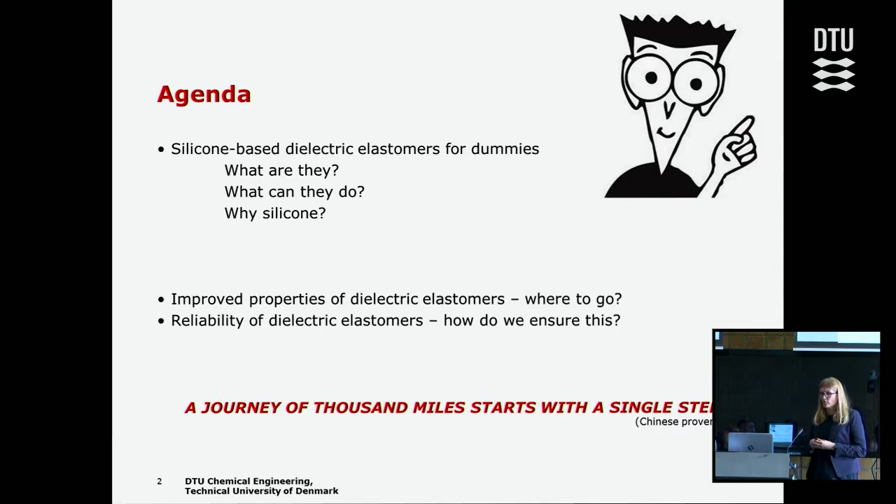Yes, thank you for the very nice introduction. And as Rasmus said, the title of my talk is Silicone-based Dielectric Elastomers. What I will be talking about is what silicone-based dielectric elastomers actually are, what they can do potentially, and why we actually chose to work with silicone. Then I will talk very briefly about where the majority of our work has been, in how we actually improve the properties of our dielectric elastomers, and also talk briefly about where I think in the future we will go. And then I will proceed to talking about reliability of dielectric elastomers and how we actually ensure that we have reliable elastomers.

So a dielectric elastomer consists of an elastomer, usually thin. It's comparable to Vita wrap films. It's just even more compliant because it's very stretchable, it's very elastic. And then we have compliant electrodes on, and when we apply a voltage over the electrodes, we will see a dimensional change of our elastomer, and then we can see that we convert electrical energy into mechanical energy. We can also do it the opposite way, where we simply actuate our material, and then we can get electrical energy out of that. That's the generator mode. We can also use it for sensing, so we can stretch it and then read the capacitance and get a measure of the deformation.

And when we talk about dielectric elastomers and why they are so great, why they are a new type of transducer, where they mostly excel is that we have a lightweight material, we have very stretchable materials, it's a strong material. And just to put it in perspective, Pippi Langstrømpe, my childhood hero, is actually able to carry one big horse. If we do the same analogy for our dielectric elastomers, Pippi should actually be able to carry 10 horses. Also in the illustration we have the small monkey riding along, and I think all the good things we have from the dielectric elastomers are also what actually create issues for us when we process, when we formulate.

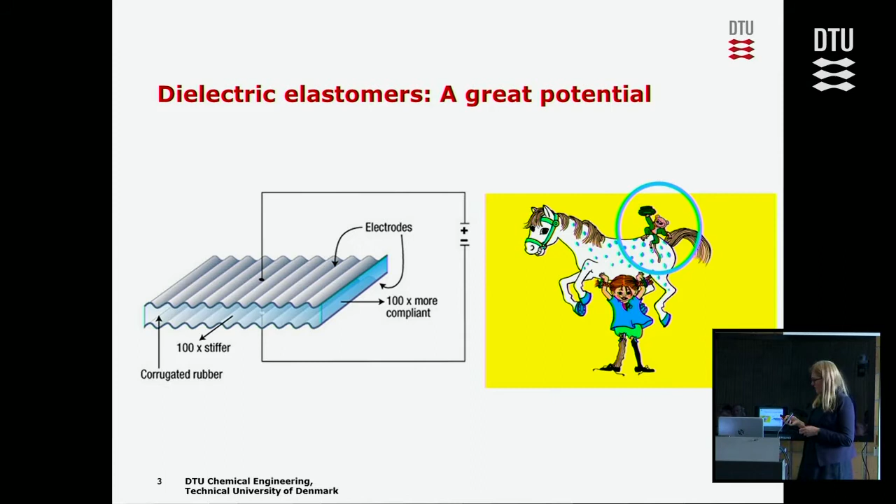So much of this talk will actually be how we get rid, like we will have to carry the 10 horses around, but we will try to get rid of the monkeys. For me, the product, a dielectric elastomer, the product is a film with compliant electrodes, but of course then other people, they proceed, they make it into products.

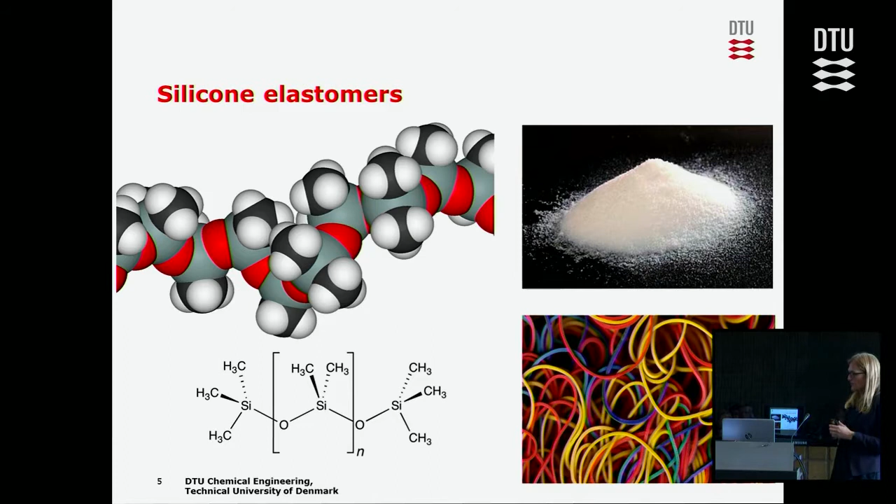So why did we choose silicone elastomers? They consist of the polydimethylsiloxane unit. We have long polymers. They're very soft, they're very flexible, they are thermally stable, and many other good properties. And then what we do is we simply cross-link it. Usually we add some silica, which is shown up there, and then we get our elastic material, which we can use for the energy transduction.

When we talk about silicone elastomers or silicone dielectric elastomers, then we are up against some other competitors. Acrylics, usually illustrated by the VHB tape from 3M. It's the double adhesive, which is used to a large extent to showcase what can we actually do with this type of materials, simply because they can show actuation up to 2,000%. That by far exceeds what we can get out of silicone elastomers. But on the other hand, we don't have any reliability.

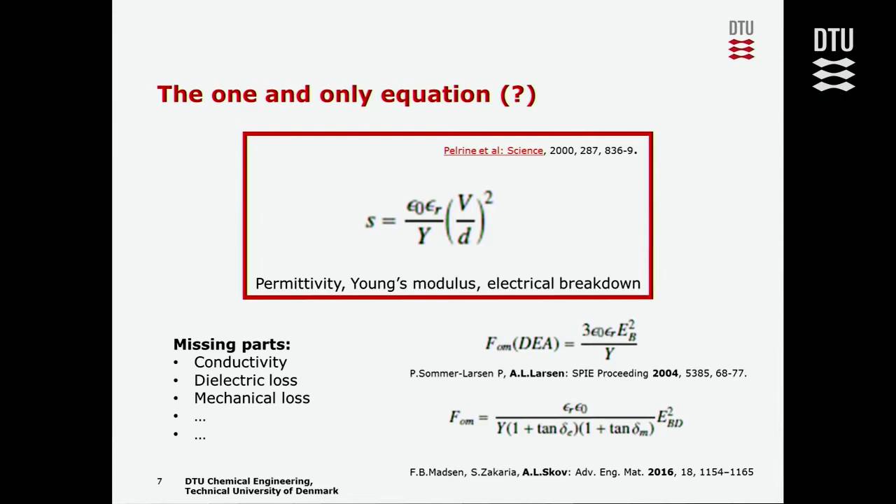And actually some of the materials that have been shown as dielectric elastomer prototypes have actually shown conductivity, which means over time we will see the material leak a lot of current. Then we have dielectric loss, we have mechanical loss, and we did some work on including that when we had to account for how good is a material. Can we make it very lossy and still claim that we have a good material? That has been done so far because every single comparison has been made based on this. So therefore we included these losses so we could make a better comparison than before.

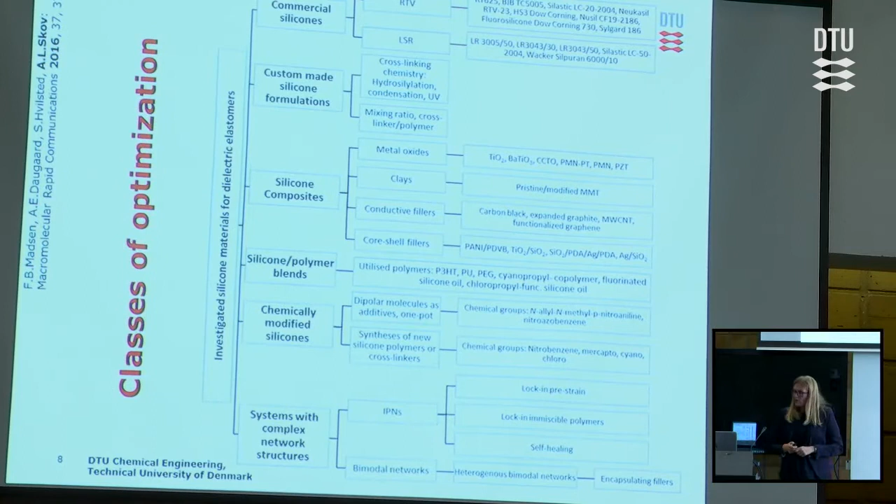So in our recent review, we looked into what has been done in the literature in order to enhance mainly the ratio, the dielectric permittivity over the Young's modulus. And we could, of course, start out just making our silicone elastomers from commercial silicones or silicone elastomers. But also work has been done on seeing how does actually the cross-linking chemistry work. Can we use hydrosilylation, condensation, UV curing, and so forth? And will it alter the properties?

And then also, I think one of the most important issues we raised in the review was to tell people a bit about the mixing ratio, the cross-linker polymer ratio. To get really nice actuation is actually by cheating and not adding enough cross-linker. Then we get back into the problems we see of the VHB tapes.

Then there are others; we have sort of grouped them into silicone composites, silicone polymer blends, chemically modified silicones, and systems with complex structures, and I'll just give one slide for each of them and tell about good and bad things. So silicone composites, I think that's the most commonly used method. It's simply taking a commercially available silicone elastomer, mix in metal oxides of various kinds, and then we have an improved dielectric permittivity, but usually the ratio of our dielectric permittivity over the Young's modulus is not improved. It's more or less constant.

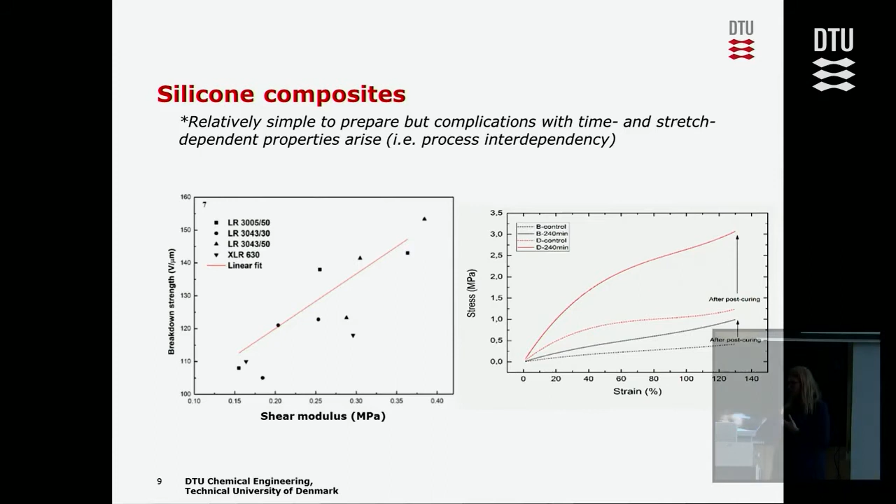And when we do work with compositing of the silicones, then we enter into a lot of problems in the processing of the films, because we get a very high viscosity, and we need to add a lot of solvent in order to make it possible to cast the films. And then what we realized was that we really had to do a lot of extra work in order to be able to remove the solvent.

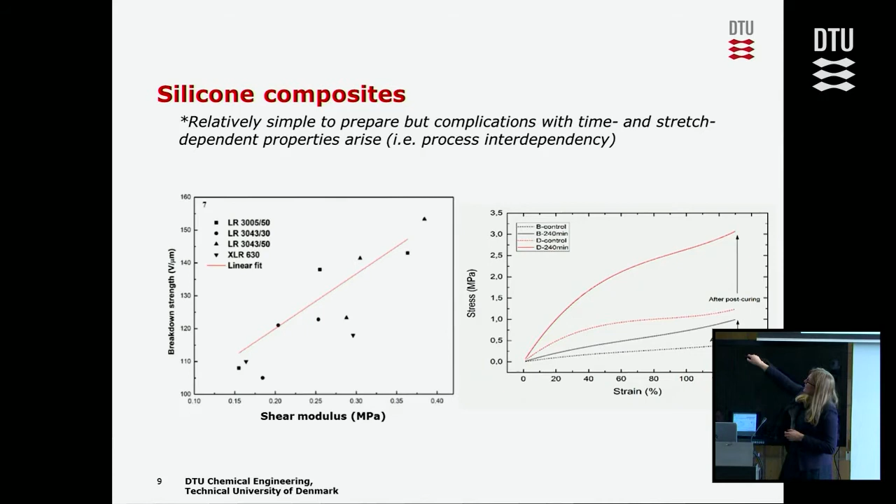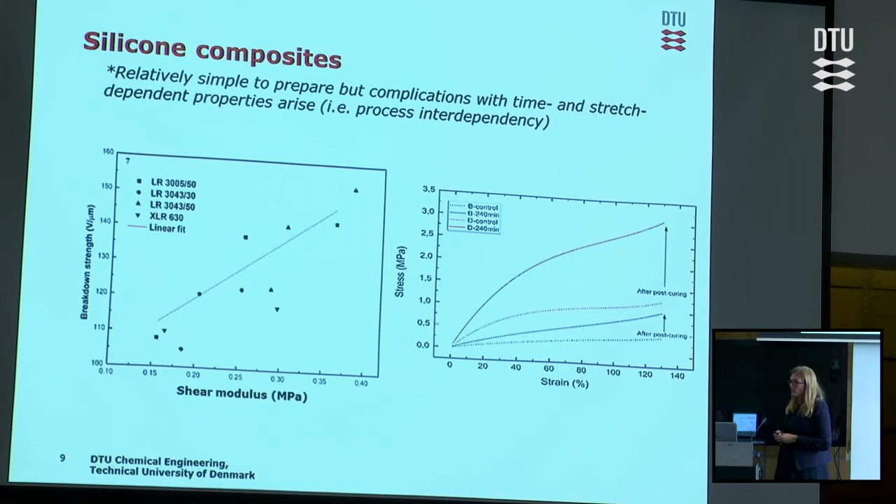Here it is just shown: we cure our elastomer, and then we have our stress-strain looking like this. We have a soft and compliant elastomer, and then we remove a few percent of our solvent, and then suddenly we have a much more stiff material. So we spent a lot of time figuring out how to remove it efficiently, and how to figure out if we actually removed it.

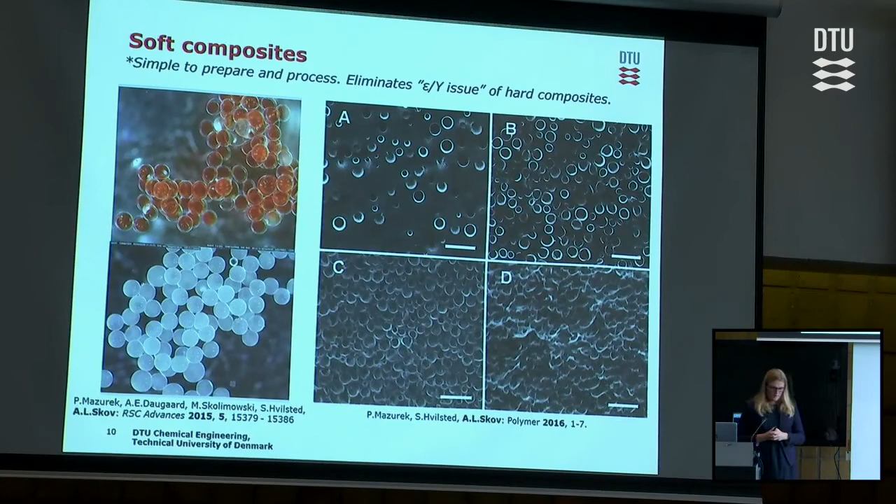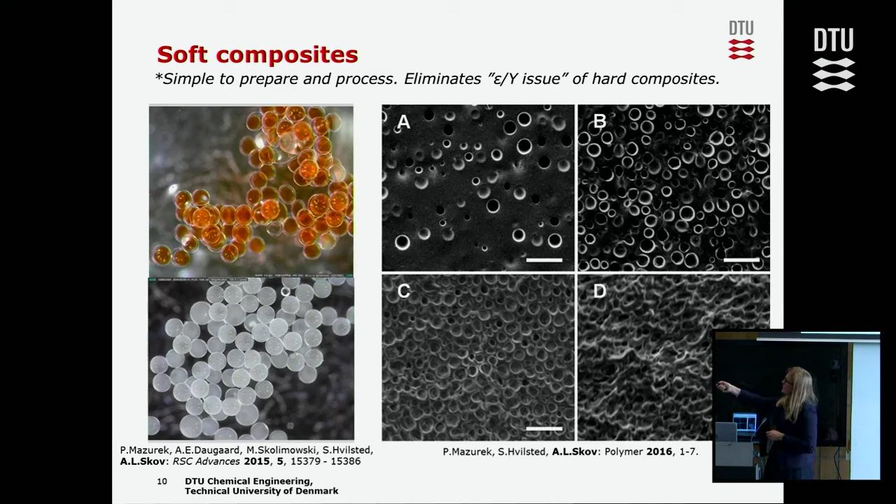So we also had the idea, instead of adding these hard, rigid metal oxides into our systems, we would like to have some soft materials embedded in the material. And we spent a lot of time initially on microfluidic devices, and we made these very nice capsules. So we have a silicone shell around the liquid, and then the silicone shell could be reacted into elastomers, but the process was really tedious.

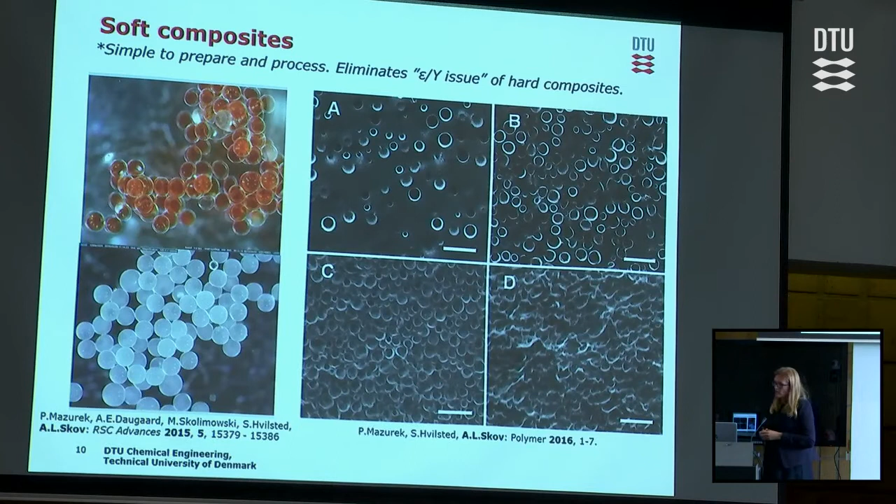And then after a year of hard work, Piotr Mazurek figured out he could actually just mix in the glycerol, speed mix it, and then we got very similar materials, but just from a one-pot experiment, more or less. And we could simply increase the loading of our glycerol, and then we would just have more droplets with approximately the same size. So that was a way to get an increased dielectric permittivity without getting an increased Young's modulus.

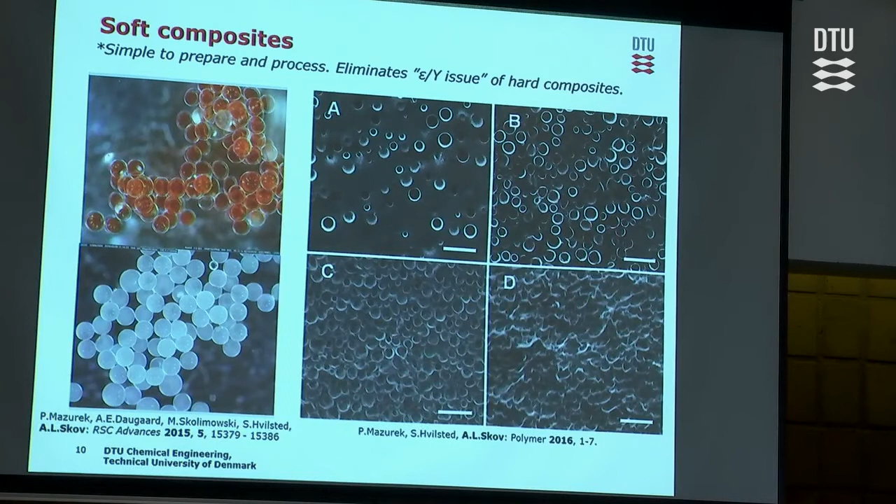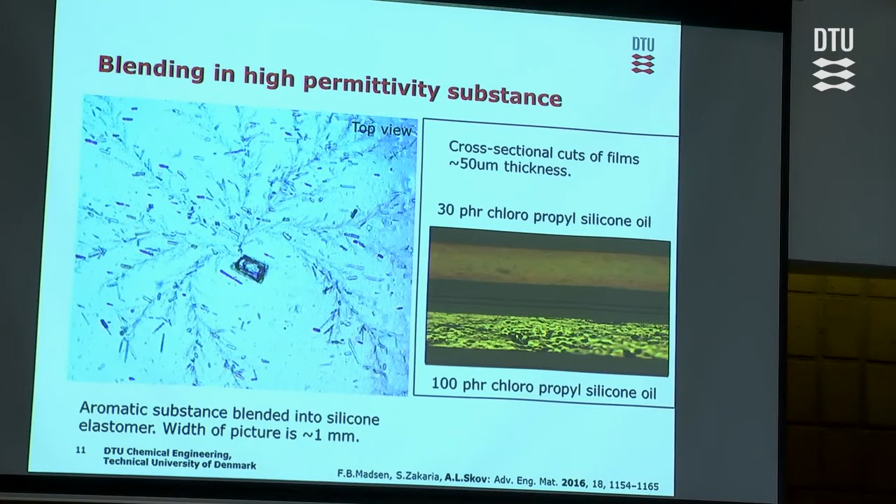Blending in high permittivity substances actually sounds really, really easy, but it's very complicated, because silicone polymers don't really like any other materials, more or less. So here we have just added an aromatic substance into the silicone. We speed mixed it. Usually that's sufficient to make sure they are homogeneously mixed. But then after casting it, it was obvious. It's actually a picture you could see with the naked eye, that we had this kind of phase separation. Of course, when you see it on this scale, then you get a clear indication of how bad it is.

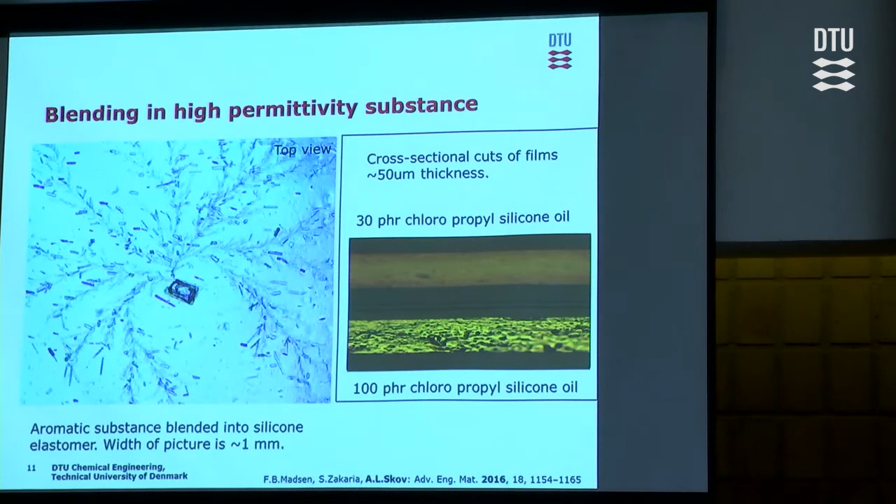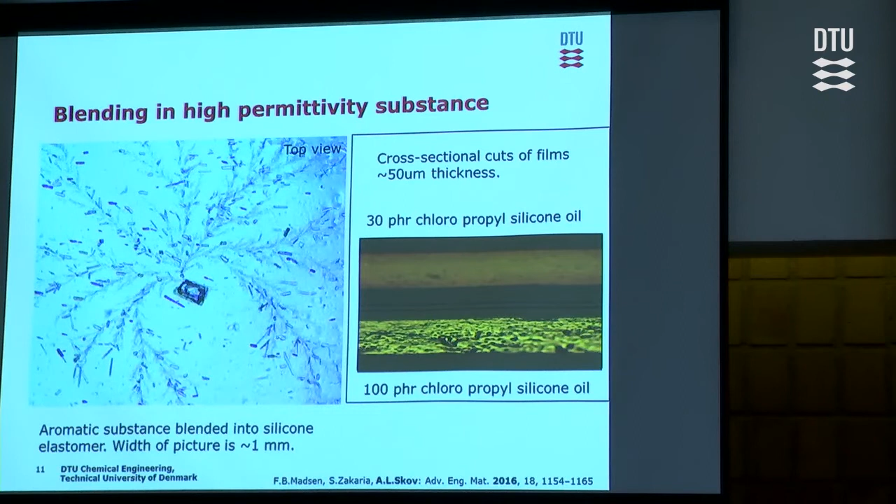But on the other hand, we tried then to work with some more miscible polymers. So we have a chloropropyl silicone oil with a few of the methyl groups replaced by chloropropyl groups. And here we have 30 phr of the chloropropyl oil in our silicone elastomer matrix. Phr is parts per hundred rubber. And here we could get nice homogeneous properties. But then when we have 100 phr, so that is 50% by volume of the oil, we actually still had a very nice elastomer, but we could see from a microscope image, that's actually the width of the film we have here, that we had very much phase separation on the local scale.

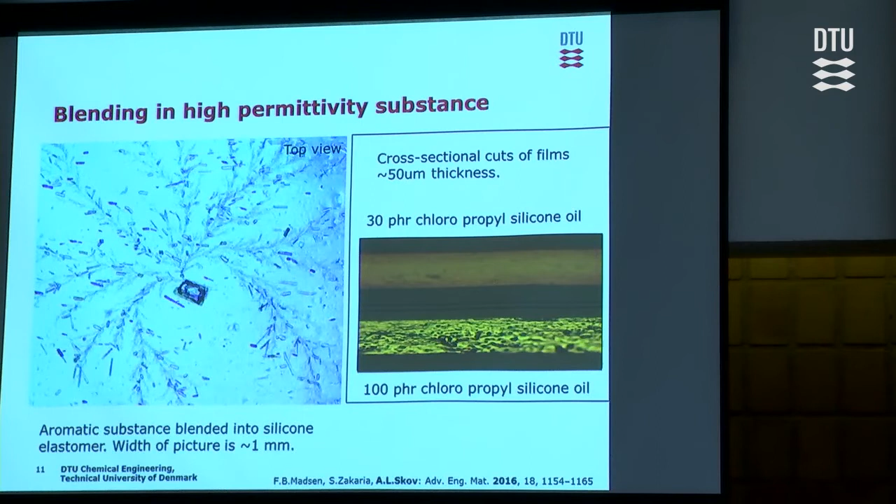So I think every time we proceed with blending in, we need to spend a lot of time analyzing: do we have phase separation? Will we get phase separation when we start stretching our materials, and so forth? So a very easy approach, but on the other hand, I think we spent the same amount of time making sure it actually works afterwards.

Click chemistry was then a way where we can introduce non-miscible substances into our materials and make sure that they stay. So the final target was that we wanted to make an azido-functional silicone polymer, where we could then, by mild conditions, click reagents into our elastomers, and then we could simply get different moieties on our silicone backbone.

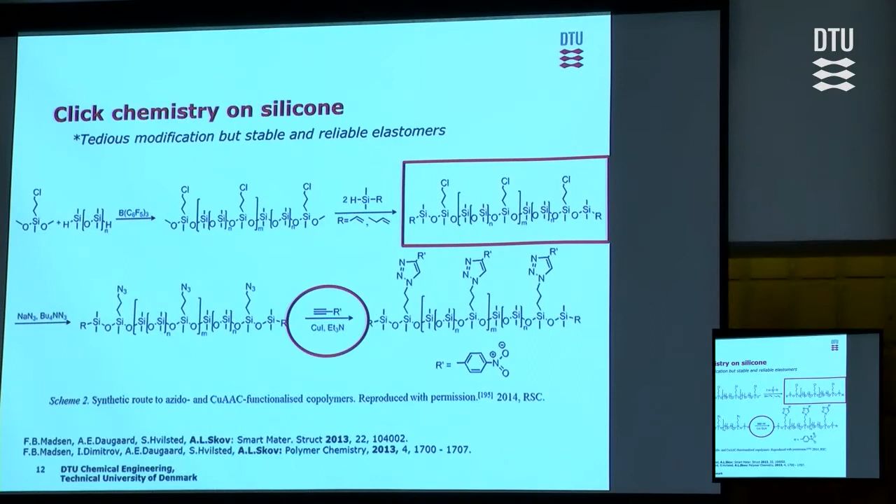Of course, it's a bit tedious. We go through a lot of steps in order to make the azido-functional siloxane. But on the other hand, then we are sure when we have made the polymers that we don't have any large-scale phase separation. Of course, these groups, they can agglomerate, and that's also what we saw, because for this type of elastomers, we realized that very small concentrations were very favorable, but when we went higher, we didn't actually get any improvement of our properties. And that we explained by simply having the phase separation on a nanoscopic level.

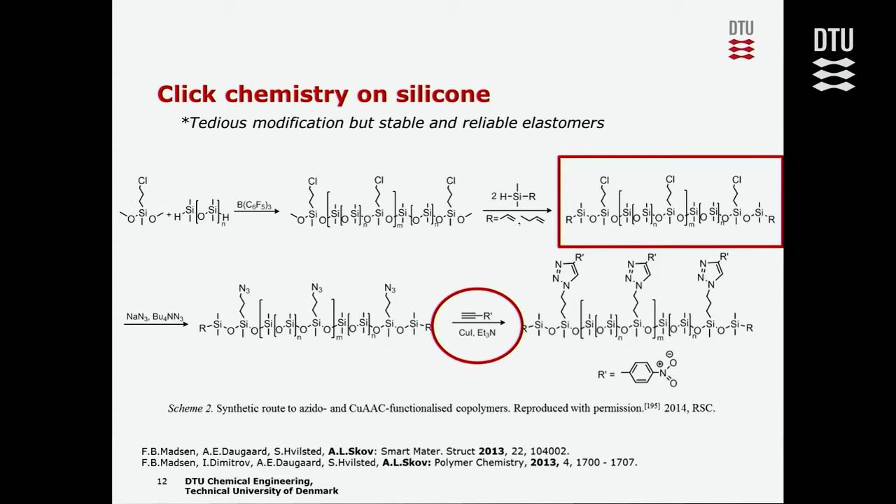Oh, I should say the click chemistry, at some point we simply thought it was too tedious, but as I'll come back to later, there are actually very good things about having the full control over the chemistry and thereby also of the elastomer. So it may be worthwhile using this approach.

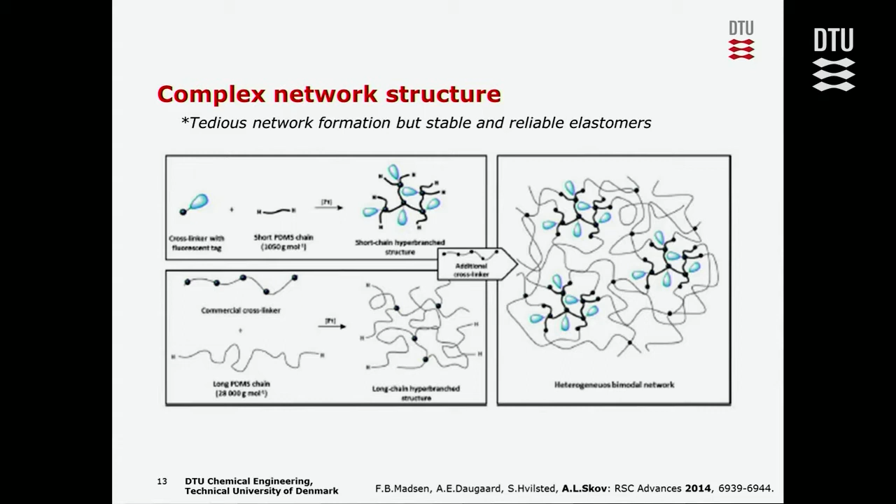Then we also said instead of improving the dielectric permittivity, we look at the Young's modulus as the sole optimization factor. And we played around with making bimodal networks. So what we did was we took a short silicone polymer and a long silicone polymer. We cross-linked it below the gelation threshold such that we got very hyperbranched structures illustrated here and here. And then we reacted them together by mixing the two mixtures. And we got materials that look like these. The blue ones are actually just fluorescent molecules such that we could see if our hypotheses held.

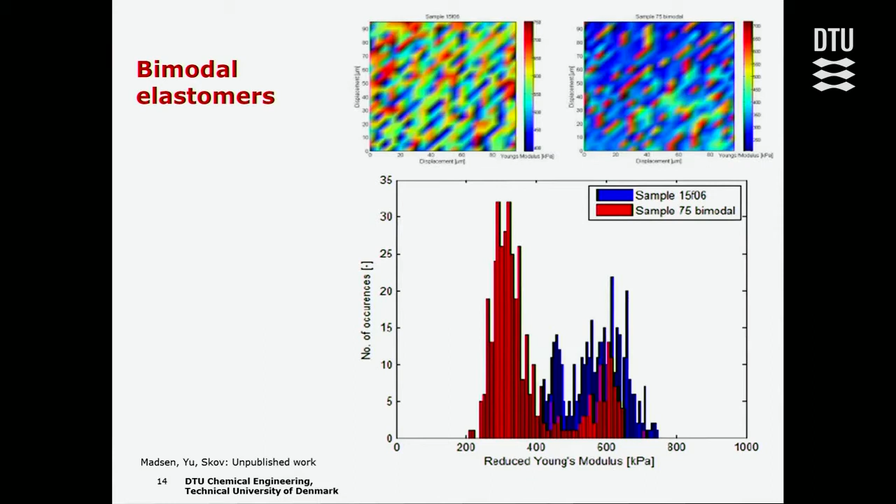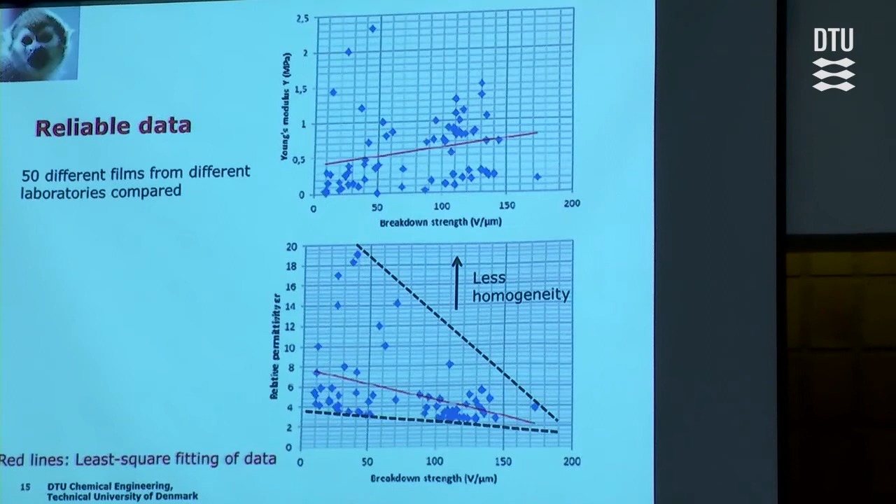And it's very obvious here that, okay, with the red line, I've made a least square fit, and we can make a fit, but it's not really a fit that says anything. We have all the outliers here. It goes a bit better when we have the relative permittivity. We can sort of say when we move up here, we have higher relative permittivity. We have added a lot of dipoles. Then we usually have a less homogeneous material, and then we get a lower electrical breakdown strength.

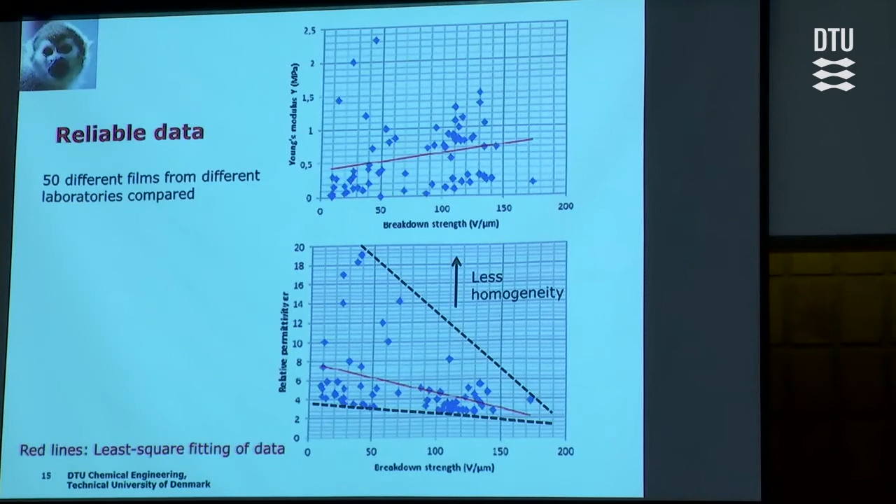But from this, it was really obvious to us that if we wanted to proceed and make models that couple, for example, electrical breakdown strength to the Young's modulus, then we needed to be sure that all other scientists, and some of our data is actually also scattered, but it's very important that we follow standards, we make sure we produce our films and also make our elastomers in a reliable way.

So how do we actually ensure that? I think the first part is actually to say, if we don't hand over stable formulations to the process, then we will actually just carry the monkey with us. And I think the monkeys will multiply each time we make a mistake, and we hope somehow the process will repair it.

But what is also very obvious is that suddenly we don't have a full material. We have sort of lumps and things falling out. Of course, in a dielectric elastomer, we won't have these big lumps falling out. But on the other hand, we can have small pieces of our elastomer film being taken apart.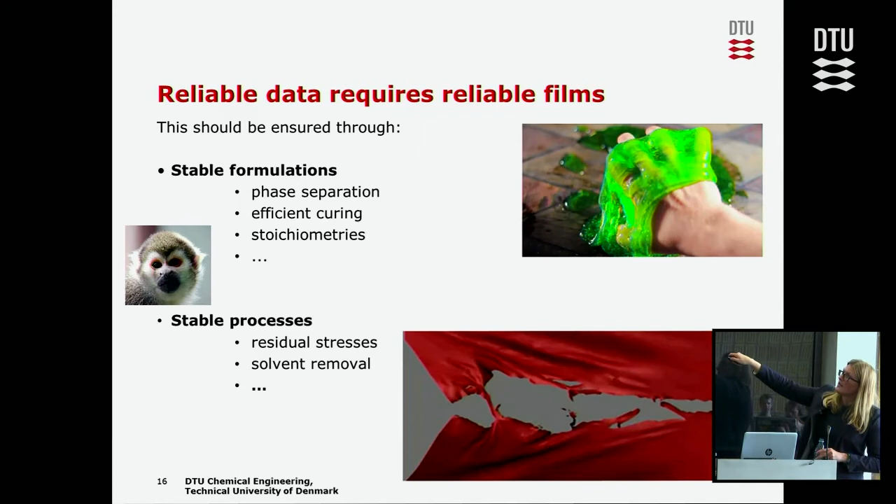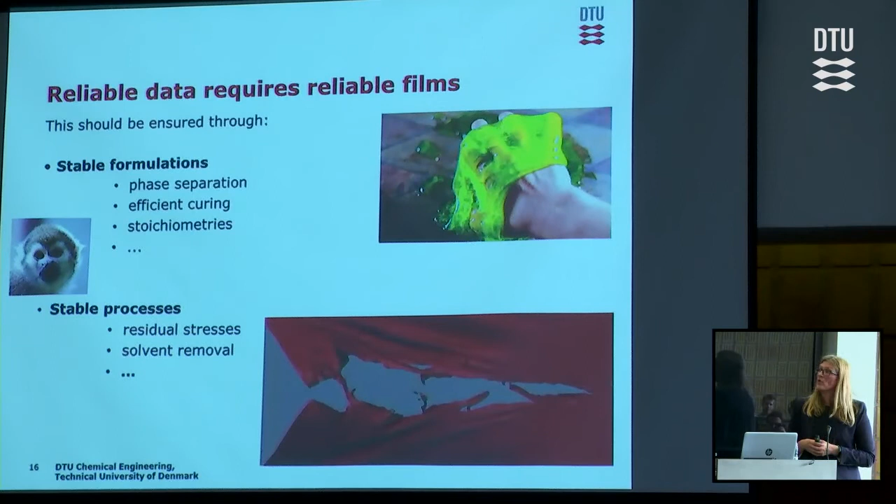Then we proceed towards the stable processes, and there it's very important we don't build up any residual stresses when we coat our films. And as I also talked about, especially for the composite, we need to be sure that we get all solvent removed. We can see that with a few % of solvent remaining in our elastomers, we really get a significant change. I showed it in the Young's modulus, but also in the electrical breakdown strength. And if we, for example, take our films, coat them and make them into products immediately, then of course the solvent will never really have a chance to leave the product afterwards.

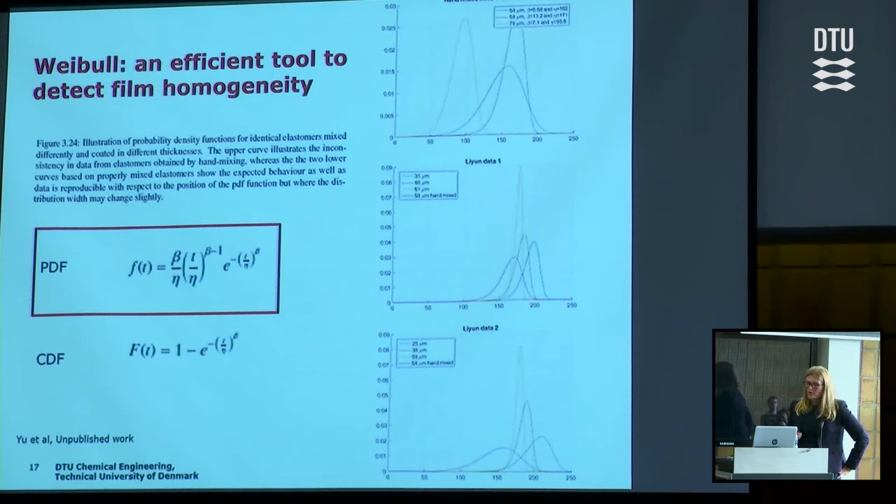Then I keep talking about how we should formulate reliably, and we should also process our films and coat them reliably. But how can we actually be sure that they are reliable? We realized that we could gain a lot of knowledge from the Weibull distribution. So we take the electrical breakdown strength of a material: we test the highest voltage we can apply before we have a short circuit in 10 to 20 places along a film. And then if they fulfill the Weibull distribution, here shown by the probability density function, then we have good data.

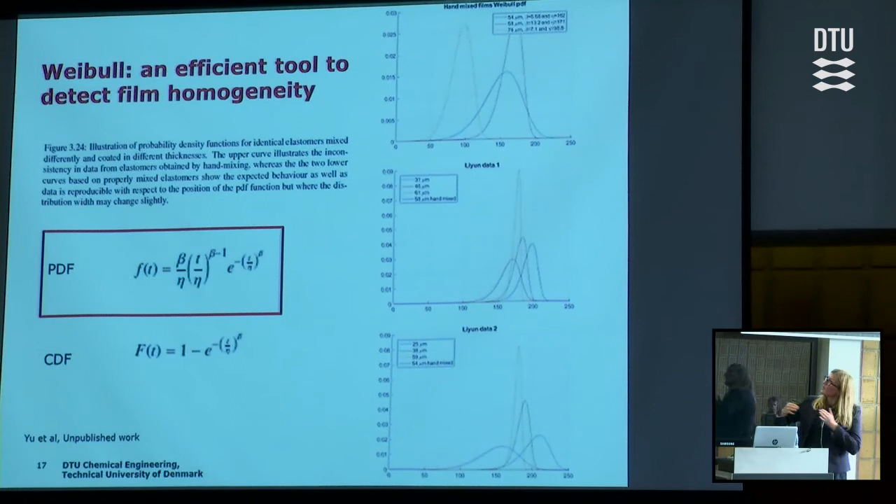I've shown it here, but I'm actually running a bit behind time. It just shows that we can use these distributions, we can compare them to others, and depending on how narrow they are, we can see if we have a reliable film. We have made films that we knew were not homogeneous, and then we can see we have good and bad parts, and they will give the width in the distribution.

Stable elastomers, of course, shouldn't really break down electrically or mechanically, but usually the problem for dielectric elastomers is a mechanical or coupled electromechanical breakdown. But when we look into the large products where we have a lot of films assembled into products, the problem is actually that we have an electrical breakdown, and it burns a hole in the film. Then usually we will have a mechanical stress over the material, and we will see a stress propagating from this area through more or less the entire product, and then the product will fail.

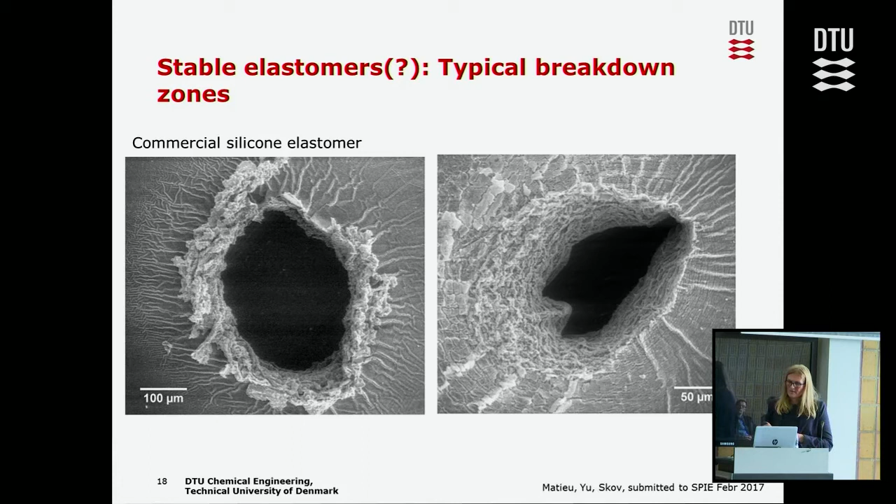We looked into that and wondered why it looked like this, and we have used labeling of the different components, and we can see that after the breakdown in this zone, we have a lot of boiling. We can see droplets forming here, so they are actually chloro-rich domains, and we are looking into how we can couple that to what is going on. But it means that this particular copolymer actually has the capability of taking up energy such that we don't have the energy dissipated out into the tear propagation.

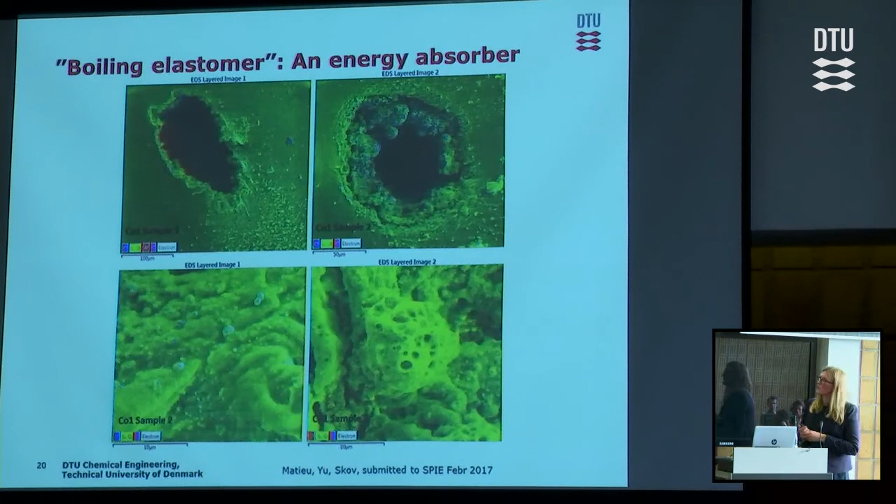So the perspective I gave in the thesis was that instead of just thinking about the dielectric permittivity over the Young's modulus, we need to focus on knowing the specification. We spent a lot of time in 3-4 years, when we had our big project together with Danfoss Polypower, trying to solve all the problems in one material. So we would say, okay, we have the same material, it's for actuators, it's for generators, but it definitely didn't really work. We had to compromise all the time.

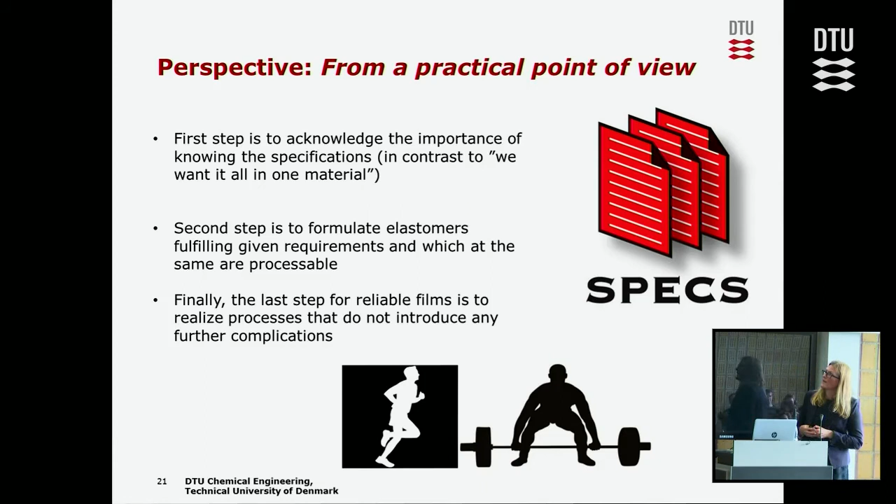So I think what we should do in the future is simply make elastomers for specific applications. The second step is that we should formulate our elastomers to fulfill these given requirements. And when we formulate them, we also need to take into account that we should be able to process them in an easy fashion. And then, of course, when we have our processing, we also need to focus on not, for example, introducing some sort of anisotropy in our materials.

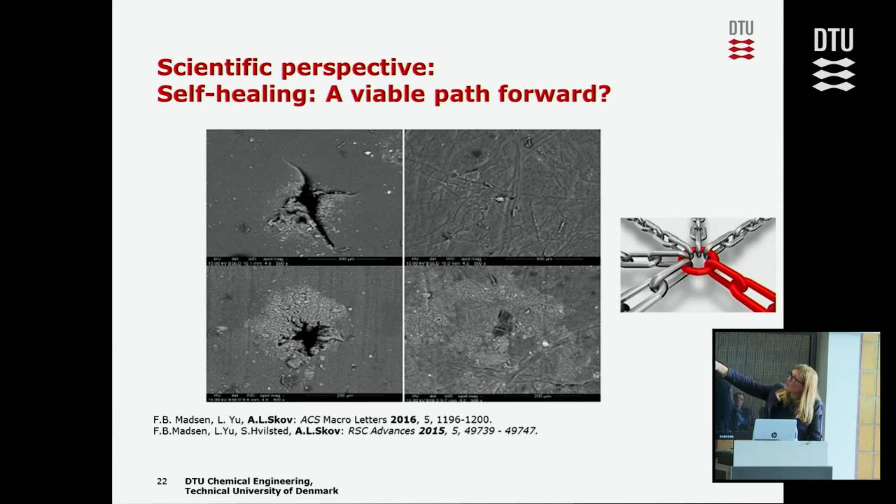From a scientific perspective, of course, I've talked about how we don't want the tearing to happen. What if we could make a solution which could actually heal all the cracks? We could maybe put our product in the oven for some time, and then it could self-heal. And that's what we've shown here by using some ionic networks. And then we can see we actually have healed the fractures. The same is shown for this.

But there is one thing about this approach. When we have the self-healing region, if this material is not comparable to the matrix property-wise, then we will see the breakdown taking place in exactly the same place again. So we are working on this now, but what we see is that if we just lose, for example, 5% in material properties here, then we just have the next breakdown and we will see a cascade and we end up being where we were initially, more or less.

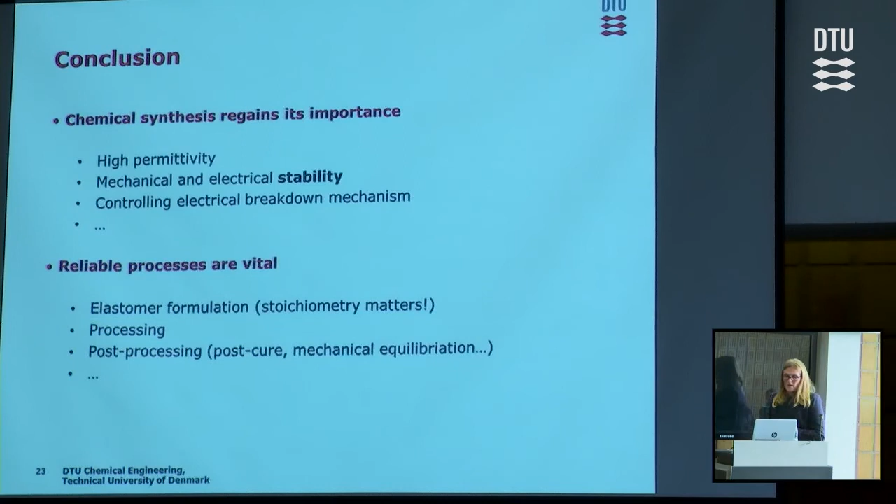But it's doable. We have now made some solutions where it actually becomes harder, and then we don't see this breakdown. So the conclusion is that chemical synthesis regains its importance in the design of elastomers. I've used this as a title because, as I said, at some point I thought we had just spent too much time on chemical synthesis. It was in the formulating that we could get the good properties.

But the chemical synthesis allows us to get high permittivity. We can have mechanical and electrical stability. And then, of course, if we can work further on understanding that specific copolymer, we could control the electrical breakdown mechanism. We could go towards a lot more reliable films. Also, reliable processes are vital. Our elastomer formulation should be stable. We have the processing, and we also need, in many instances, to focus on the post-processing of our materials.

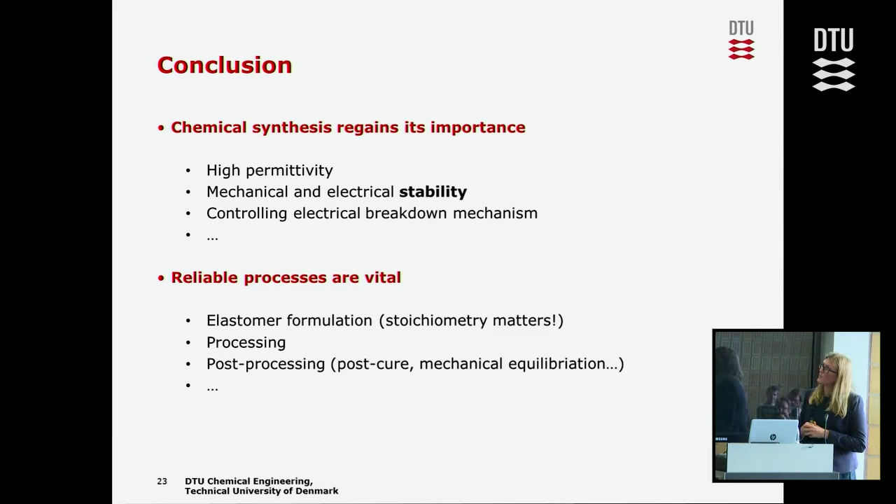I didn't talk about it in the presentation, but the mechanical equilibration is actually a very simple procedure to be sure our material will always behave the same way: stretch it to a very large extent, because then all our materials will behave identically.

Then the acknowledgement. I would like to thank Peter Sommer-Larsen and Mohammed Ben-Slimane for teaching me a lot of things on dielectric elastomers. They've been a great inspiration, both of them. Senior scientist Liyun Yu is the one who makes sure that I forget that it's actually hard work doing experiments. I just say to them, go out, do it, and then they do it because I have Liyun fixing all the experimental problems.

Then I would like to thank former and present students and colleagues at DPC. Frederikke Barth Madsen did the chemical modification, and she was so kind to proofread my thesis. All the PhD students and postdocs mentioned here have contributed to the work in the thesis. I would also like to thank Professor Ole Hassager for giving me the chance of doing a PhD in this department. Anders Ladegaard and Søren Hvilsted are acknowledged for helping me a lot with the chemistry, so I dared moving beyond distillation chemistry. Katja Yankova read the first version of my thesis. And of course, I would like to thank DPC in general for providing such a great research environment.

And John Willersen was actually the one who got me hooked on this idea. He kept saying it was a good idea, something everyone should do. So he also deserves an acknowledgement. And Kim Dam Johansen, my boss, was the one who kicked me once in a while and reminded me about deadlines. So thank you for keeping me working.